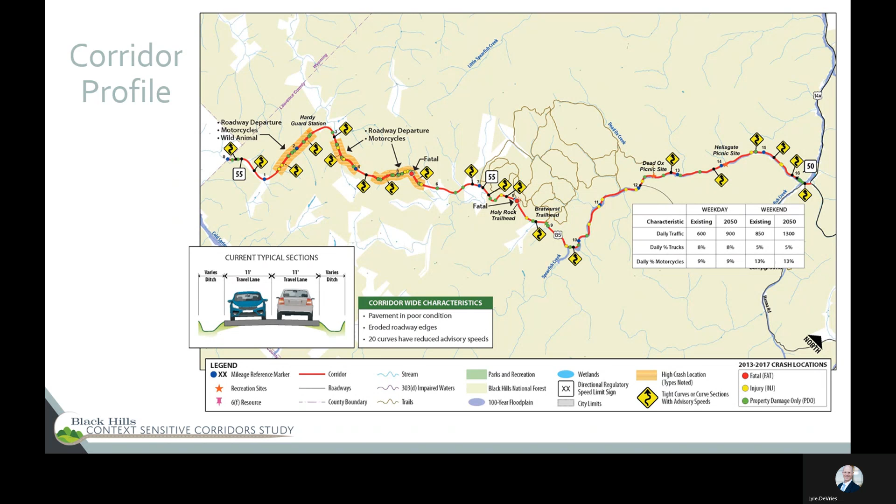Strategies developed by the team to help Corridor 3 better fulfill its purpose while complementing the context include several improvement types. Shown here are current and proposed typical sections. The current cross-section for the roadway reflects a lane width of 11 feet and minimal to no shoulders. The preferred section, more conducive to the regional higher speed travel envisioned for this corridor, includes 12-foot lanes and paved or a combination of paved and gravel shoulders adding up to 6 feet in width.

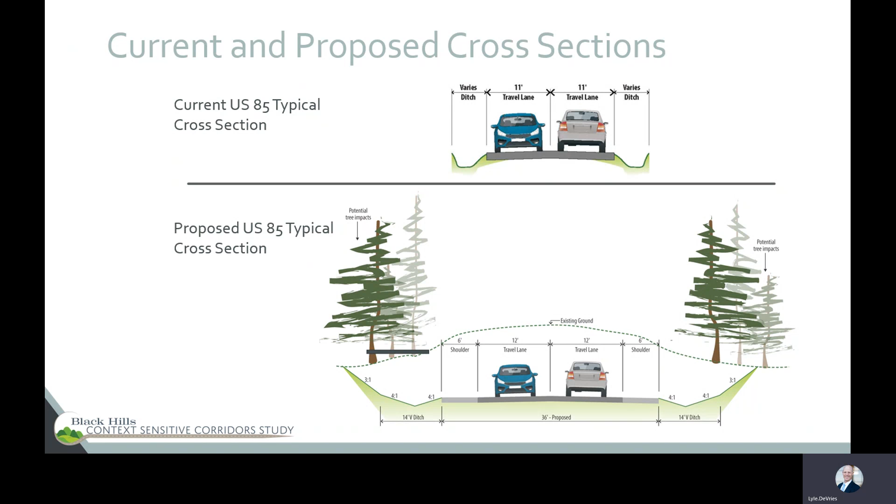To safely support higher desired speed requires looking also outside the paved width to establish a sufficient clear zone. In summary, the widening here would add about 10 to 14 feet to the overall current width of the corridor.

Additionally, from a design perspective, there are approximately 20 curves along the corridor with speed advisory signs warning drivers to slow down for the curve. A goal for this corridor is to minimize the number of these advisory curves. And to do this, we can increase the radius of these curves, flattening the curve, and this can greatly improve the potential to maintain the desired speed and travel time.

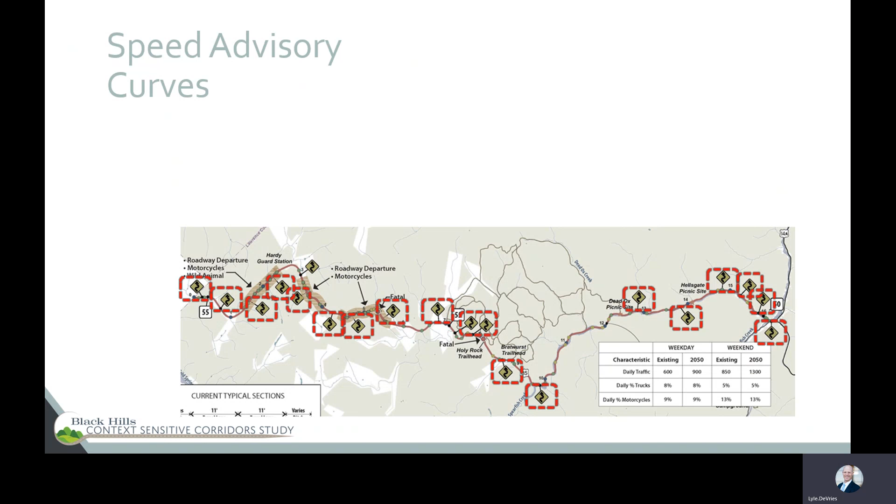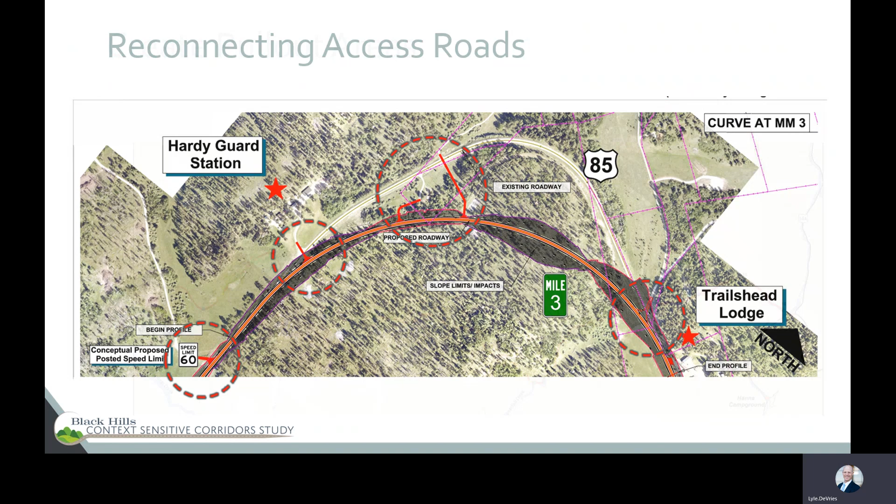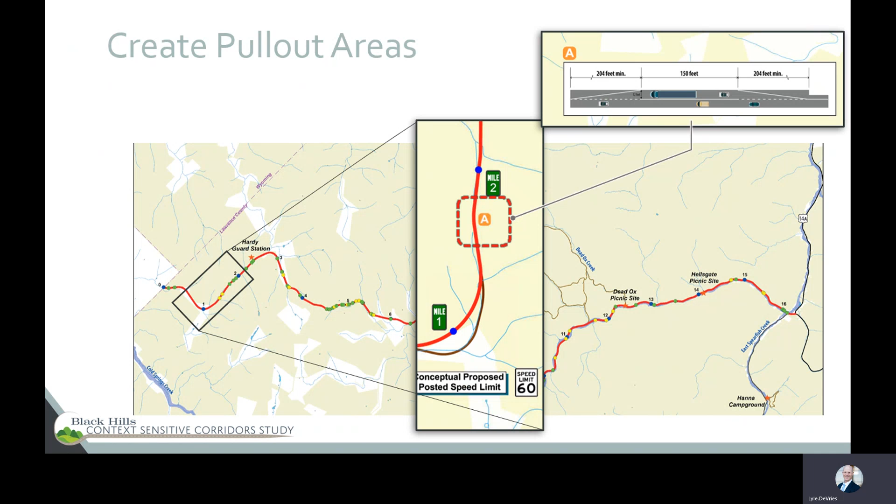Another need is to create more pullout opportunities along the corridor, as depicted here. Such pullouts provide a refuge for drivers needing a short pause and allow faster moving traffic to progress more safely and efficiently. The need for pullouts has been incorporated throughout the corridor concept.

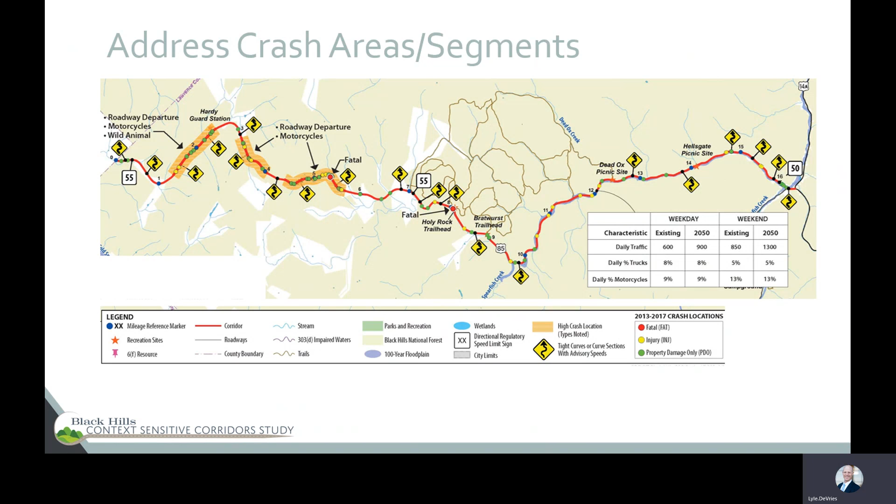Improvements are also focused on reducing crashes. The west end of this corridor has several segments that in the last 5 years have experienced higher crash rates, shaded in orange here. Additional design effort was applied in these locations to address crashes as well as support the needs of travel time reduction and convenience for freight and commuter traffic. Widening travel lanes, adjusting roadway curvature, adding shoulders, and creating an appropriate clear zone also support crash reduction.

Across the 16-mile length, there are essentially three distinct shifts in terrain severity that influence the definition of potential corridor improvements. Starting on the west end, relative to other portions of the corridor, areas adjacent to the roadway are more open, which better accommodates flattening curves to support higher speed design. Within this portion of the corridor, improvements assumed a posted speed of 60 miles per hour, which is consistent with state design guidelines for U.S. routes. This particular graphic depicts a curve realignment to help achieve that posted limit. Pullouts are also identified for this section of the corridor.

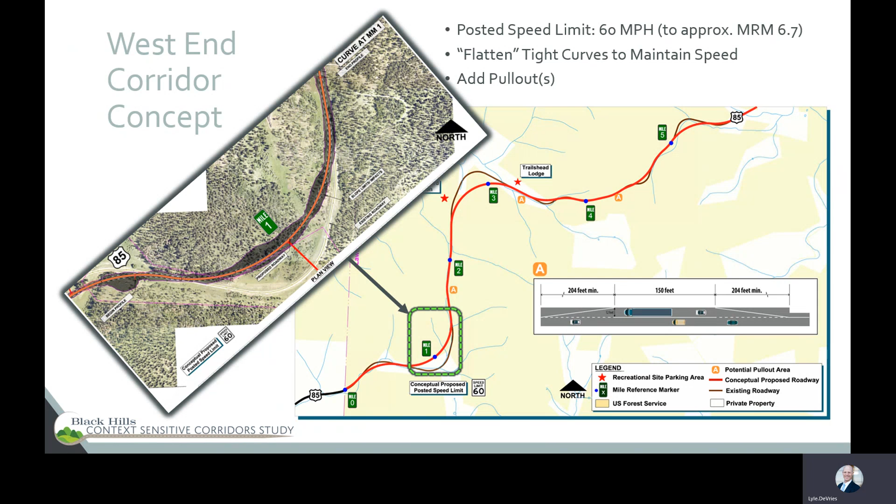Within the middle portion of the corridor, beginning at about mile reference marker 6, US 85 enters more rugged terrain. It's kind of a transition zone. This rugged terrain restricts the ability to flatten many of the curves to accommodate that higher posted speed. Thus, the posted speed objective transitions in this area from 60 miles an hour to 40 miles an hour posted speed. This lower proposed operating speed allows for shorter radius curves before needing to post a speed advisory sign, and the shorter radius curves reduce the area of potential impact. Pullouts and parking area enhancements again are shown in this section of the corridor.

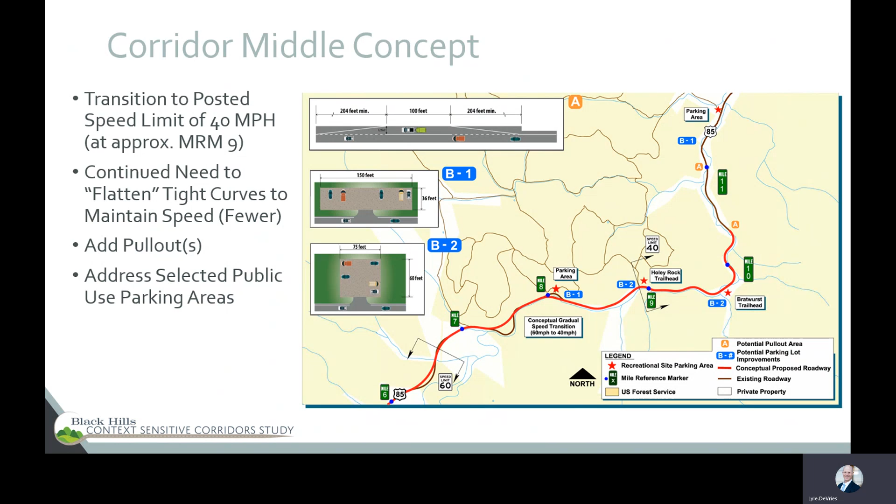At the mile 9 point, the number of adjacent recreational uses such as picnic areas increases, which results in more turning traffic, and the roadway terrain also becomes increasingly constrained. To safely support access to and from these areas and complement the context, the assumed operating speed in this portion of the corridor was stepped down to 40 miles per hour.

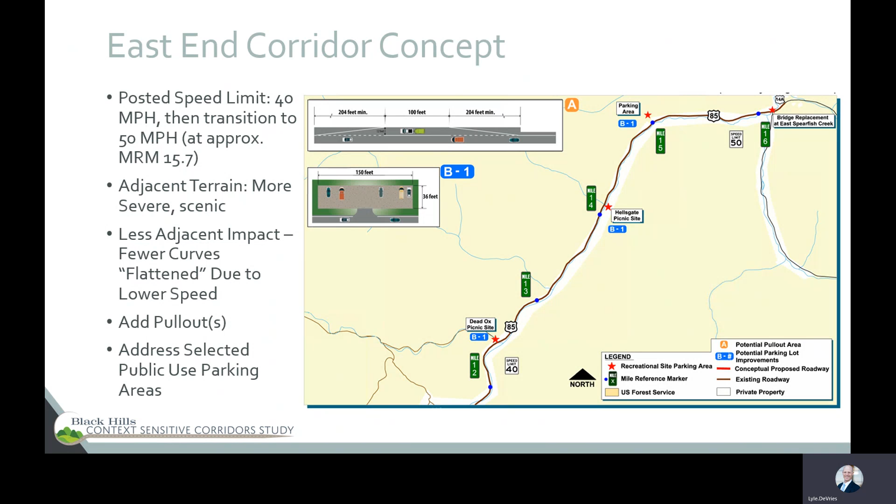An initial environmental scan has been completed to understand current environmental resources that could be impacted by the proposed improvements and set the stage for future environmental analysis and clearance processes. Resources present throughout the corridor cover wetlands and potential historic structures. National forests and tribal lands are also found. These resources need to be carefully addressed as improvements are advanced further in design.

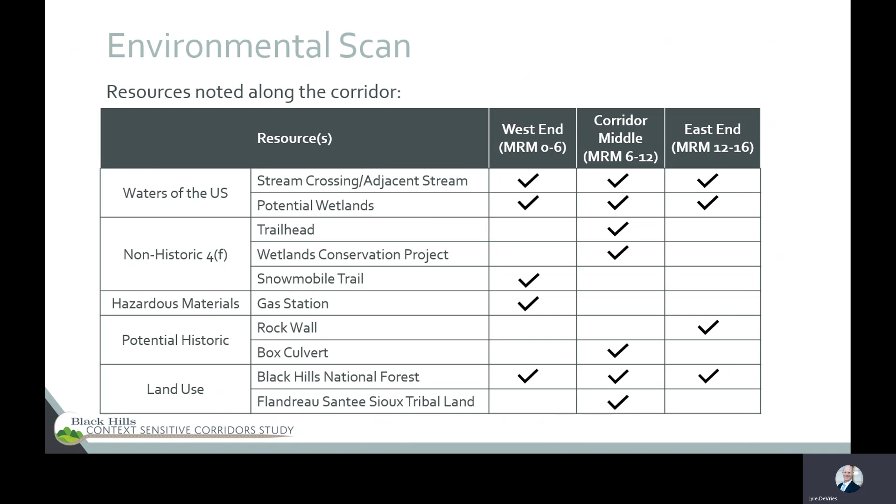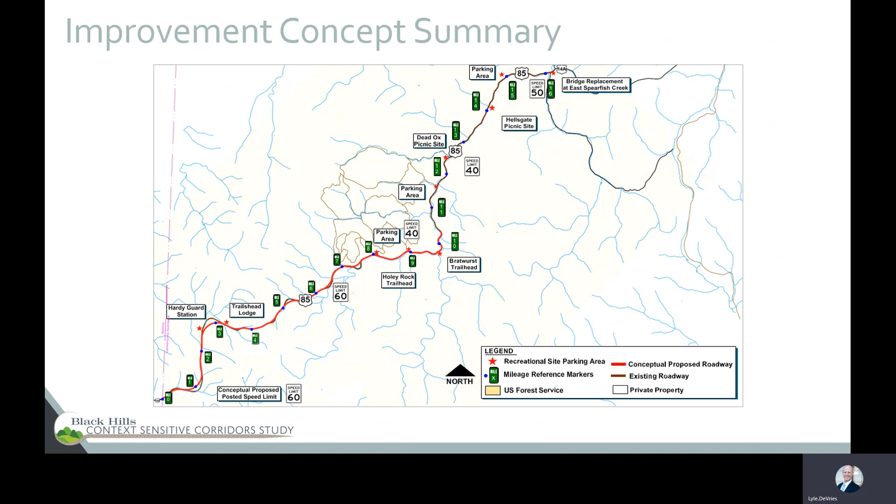In summary, improvements to Corridor 3 are directed toward reducing crashes and increasing travel speeds for regional freight and passenger vehicle traffic. The corridor concept includes widening of the roadway to accommodate increased travel lane and shoulder width, realignment of some horizontal curves, particularly in the western portion of the corridor to increase posted speeds, and provision of pullouts to accommodate slower moving traffic and provide a refuge for drivers in need of a break.

A red-green rating system is provided to allow for simple review of the performance of corridor improvements. This matrix depicts the Corridor 3 ratings. Red circles indicate greater impacts or costs and less consistency with the design guidelines and overall corridor vision. Green circles are generally positive, denoting lower costs and impacts and higher design and vision consistency.

The identified vision for Corridor 3 is to support commercial and commuter travel as a part of the National Highway System network. This vision is best fulfilled within the west and middle portions by the improvements that have been identified, but the constrained east portion limits the ability to provide those higher travel speeds. The proposed improvements are quite successful at improving consistency with SDDOT design guidelines. Environmental and property impacts are greater in the west and middle sections, where more curves are being addressed with realignments. The proposed improvements are of a relatively higher cost, particularly in the west portion, due to pavement widening and curve corrections.

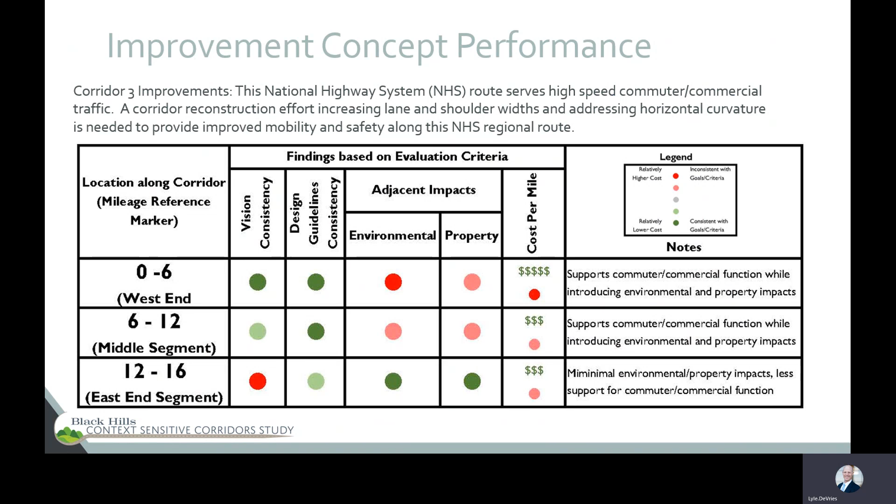To learn more about Corridor 3, click the orange Get Started Now button below this video. This will take you to the overall corridor location map. By pressing and holding the left mouse button, you can move the overall map to view the corridor you're most interested in, in this case, Corridor 3. A quick mouse click while hovering over Corridor 3 will take you to more detailed information. Shown here, the type of information includes corridor realignments or different improvement types that you can view and comment on. You can click on those improvement types to then provide your comments and navigate back to the home screen by going back to the gray ribbon on the left side of your screen. The corridors icon is also located in the gray ribbon to help you navigate.